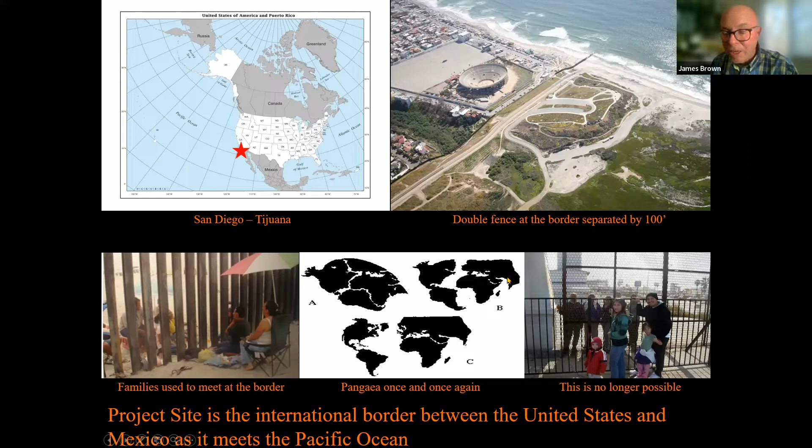Imagine, not that long ago, this is the way families used to meet close together. We're talking 10 years ago, this was the primary fence. You could meet, you could see each other back then. You can no longer do that. Year by year, the kind of communion we used to have has been taken away, one small Border Patrol order after another.

Here's the site, an aerial view. Again, the 30-foot tall fence build stopped here in the nick of time when Biden was elected, and now they're about to build it all the way to the sand right there. Here's Friendship Park, the center of Friendship Park, and the monument is right at this location.

It's worth remembering that only in 1971, when a Republican First Lady named this park, designating it International Friendship Park, she actually had her Secret Service agents cut the strands of barbed wire, and she walked into Mexico shaking hands and hoping for cooperation and solidarity in the future.

We have a treaty with Mexico. It was signed in 1848. And in the treaty, part of it says: upon a solid basis, relations of peace and friendship, which shall confer reciprocal benefits upon the citizens of both, and assure the concord, harmony, and mutual confidence wherein the two peoples should live as good neighbors. We're not fulfilling that treaty.

Especially in these times, do we need a place along the border that reminds us that the ordinary citizens of Mexico and the US are indeed friends. And we believe the best security we can have with our closest ally to the south is cooperation and trust.

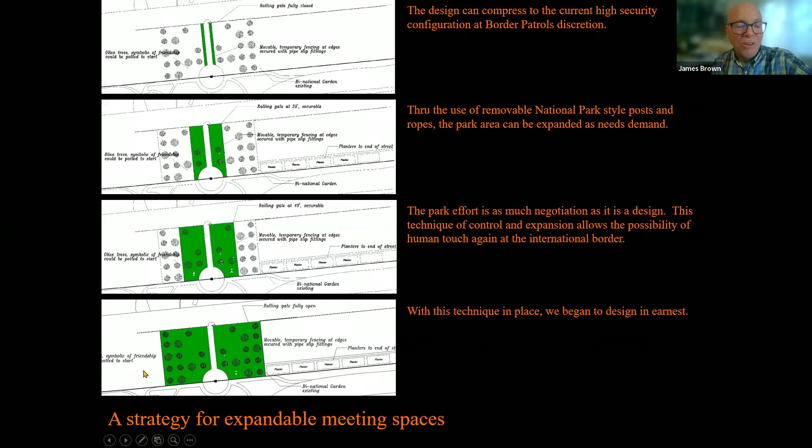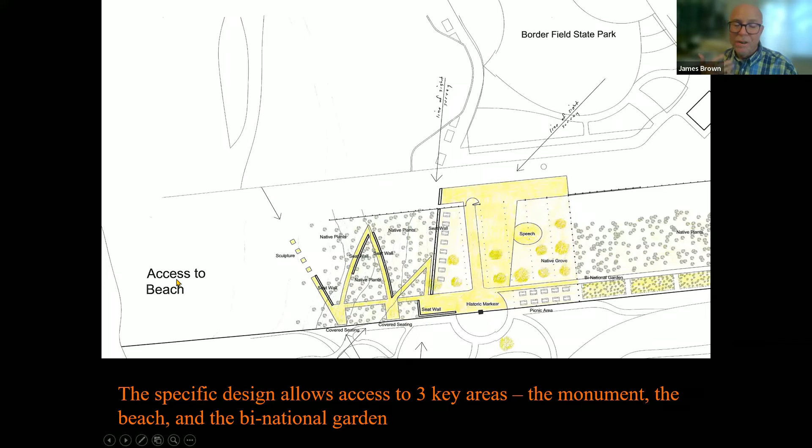It stayed that way for many years until slowly Border Patrol started taking away old promises. Shortly before they started going backwards in their negotiations with Friendship Park, we have long wanted connectivity - not just the historic marker at the center of Friendship Park, but the Binational Garden to the east and access to the beach to the west. These are three really important accesses we have been negotiating with Border Patrol for many years.

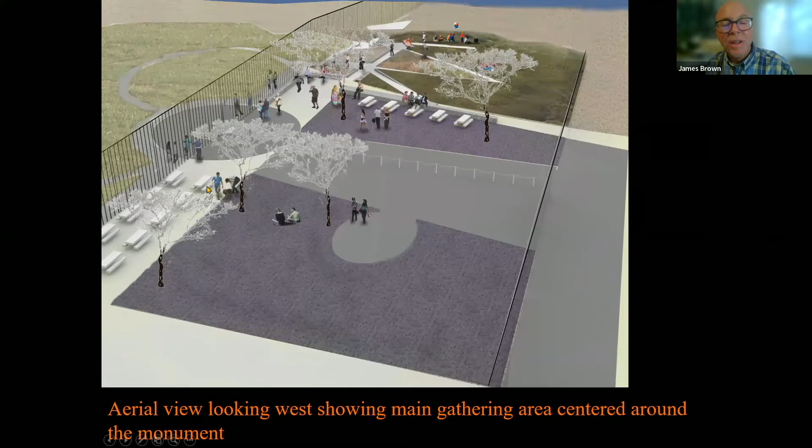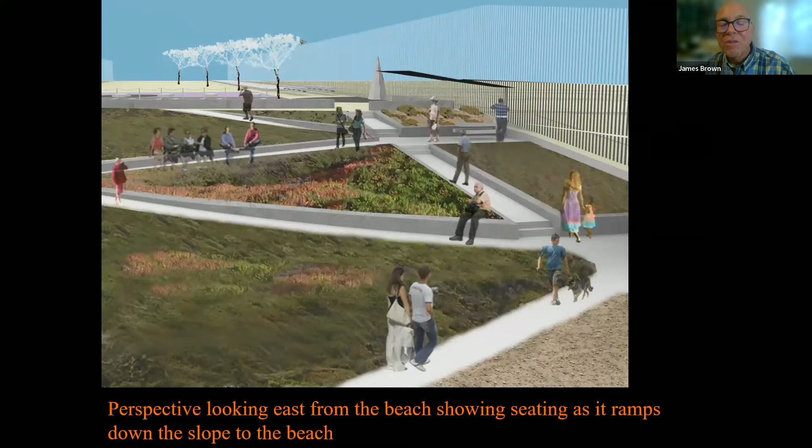We had done several diagrams, discussing what kind of furniture could we have that they would approve of. We were getting pretty far for a long time. We had some imagery of discrete meeting places where you wouldn't have to stand right next to another 35 people, so then you could whisper to your friends and loved ones across the fence.

If you're seeing your grandchild maybe for the first time, you would travel, wouldn't you? You would travel 1,000 miles or more to do that, and Zoom would not be good enough. If you were seeing your parents, maybe thinking it might be the last time, you would travel again. And people used to do this commonly, because there's no substitution for people being able to look in each other's eyes, talk quietly, touch each other.

We were talking about increasing the hours at Friendship Park where we would be able to use it. And well, that was from 2010. Things were a lot different then. But I feel like we can return to that kind of communication. We have a chance anyway. We're going to sure try. We're going to give it a fair shake.

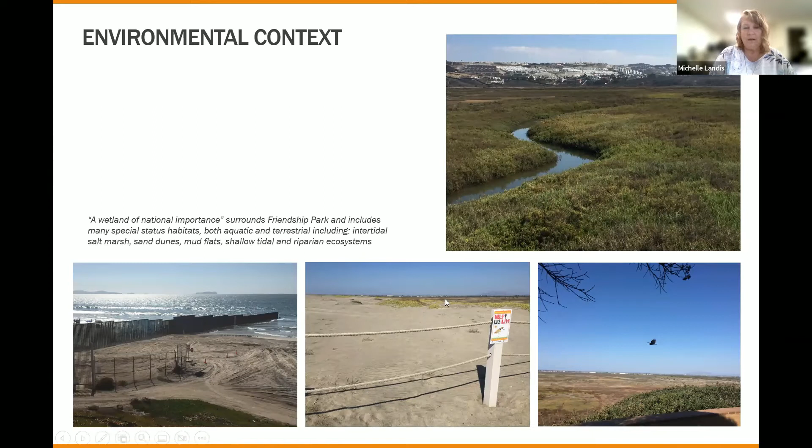This is sitting in wetlands of national importance. A lot of different special status habitats occur here, and a lot of research happens here. You've got sand dunes, salt marshes, tidal systems—very productive and important habitat areas surround Friendship Park.

In addition to that, there's a lot of cultural and historic context to this park. There are Native American use areas that fall all around the park and in the general area. We also have a lot of interesting World War II activity, training facilities, and coastal defense bunkers within Border Field State Park, and a lot of artifacts still in existence.

One thing I find very interesting is the Portola expedition came right through just east of Friendship Park, which is of course the journey of Father Serra moving up to start the Presidio and the first mission in San Diego. There was a campsite in Goat Canyon, just east of the park, so a lot of people haven't connected that.

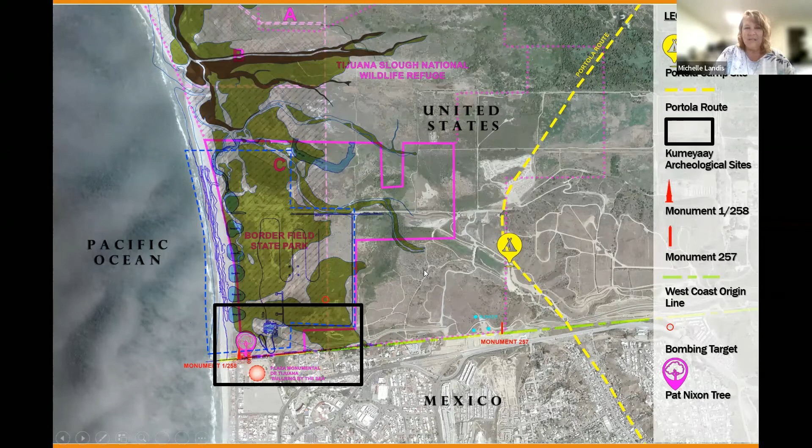So there's all these interesting things happening in Border Field and in the environments. And then, of course, the center, the heart of our park is our historic monument.

As Jim talked about, the Treaty of Guadalupe Hidalgo ceded Alta California to the United States. And a binational survey team came together and set the point of origin for the country, which is the location of our historic monument.

The original monument, Monument 1, was installed in 1851, and it was uniquely different from the other six monuments installed across the border, and it became very quickly a tourist destination in the Victorian era.

In that era, one of the things people would do was chip a little piece of the marble off and take it home for a souvenir. So in 1894, the marble of the obelisk was refinished, and it was renumbered as Monument 258.

And there was fencing put around it to protect it from souvenir hunters. So that monument that's kind of on the south side of the wall is the original monument installed in 1851.

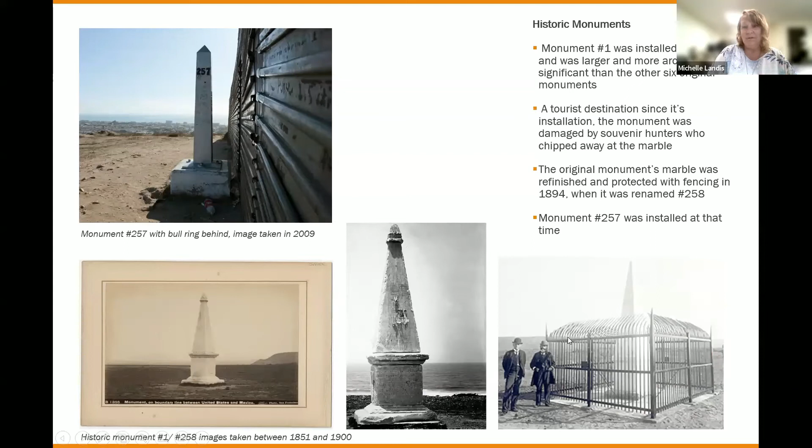So we kind of move into the postmodern era, recent past, jumping forward quite a few years. You've had a military past use, and now the land has become returned to surplus.

So part of Border Field State Park land is purchased by the people from California, and part of it is donated as part of this land grant from the Nixon administration's Legacy of Parks.

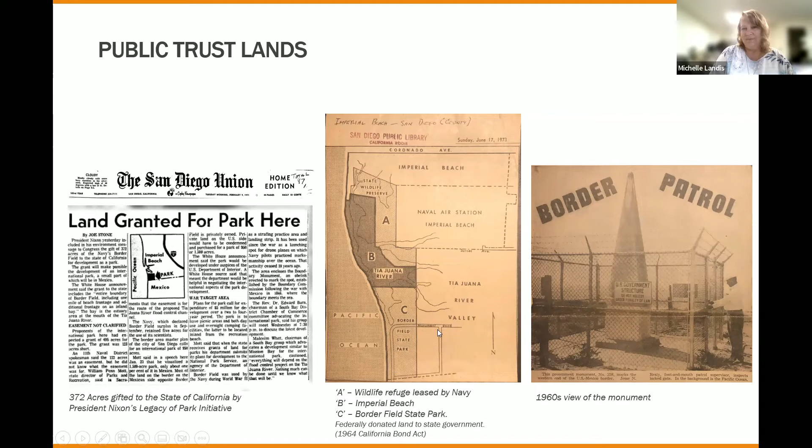August 18th, 1971, Pat Nixon comes out and does an inaugural ribbon cutting to this park. It is declared the first phase of International Friendship Park.

As Jim mentioned, she planted this historic tree. It's kind of back and forth whether that's the original tree or not. We know it is the correct species. Whether it was replaced at some point or not, we're not sure.

But she does have the Secret Service cut the barbed wire and walks in to greet adoring fans in Mexico. That's a fun little side foray that probably made the Secret Service very anxious that day, I would imagine. In 1974, the monument was placed on the National Register of Historic Places.

And there's a park design that really celebrates this moment in time. You can see each country has put their national flag, and there are small granite markers and plaques that commemorate this event. The flagpole and the plaque and the granite base still exist on the Mexico side.

I'm not sure when the flagpole disappeared on the US side. We know that the marker and plaque disappeared around 2012 with some of the renovations, when it was already in the secured area. So here's a view of the park in 1986.

Although this area is fenced, you still have some visual permeability and the ability to kind of connect with your loved ones. Also, the bull ring is a significant piece of architecture from this era.

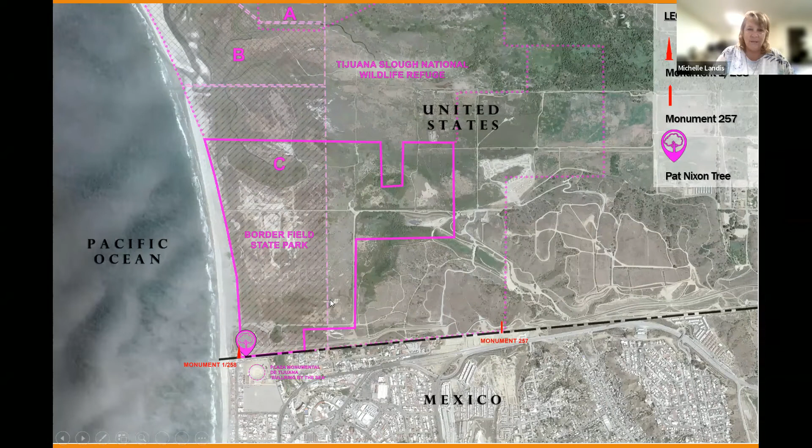And then moving into the present era. Really starting in the 1990s is when you see the real fortification of the border occur. This is a response to the debt crisis in Mexico and the war on drugs. And so military surplus runway panels are used, mounted vertically, to create this wall to control access across the border.

Prior to that time, a lot of times families could just ride horses, kind of go under the barbed wire or around it and meet with their family on the other side. And I certainly have people in my circle who talk about doing that in the 80s.

In the 1990s, you can get a closer view of what that fencing condition was through Friendship Park, but there's still the opportunity to engage with your loved ones and meet with them quietly and be able to connect.

Of course, we have the tragic terrorist events on September 11th, 2001. This really sets a series of things in place to secure our borders even further. You have lots of money available for border construction projects in 2006 and 2008. That's the point where the statutory waiver, or statutory exemption, of all environmental, historic, and cultural protections for border projects are put in place. So some of you may know that nothing is protected from these border projects, which has been a problem throughout the Southwest and something we're certainly concerned about here.

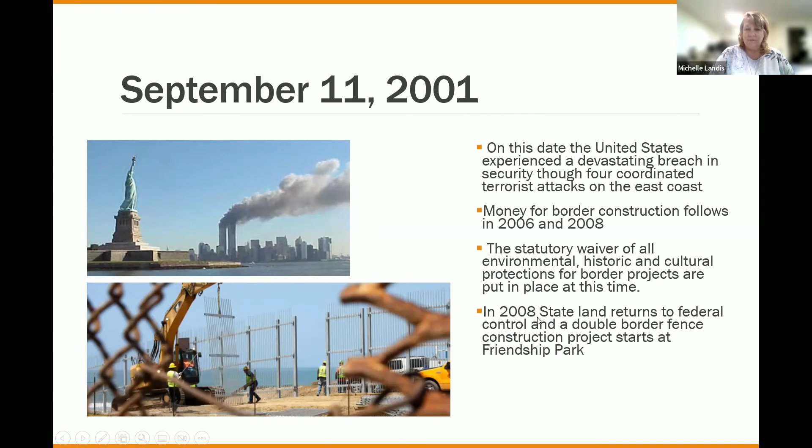In 2008, the state land returns to federal control, and the double fence construction commences. So you can see the condition in 2008. Moving into 2012, again the wall is pulled back away from the monument, probably having to do with the footing of that wall not being allowed to cross into Mexico's territory.

And then present day, you can't even approach the secondary fence. This is the line of no trespassing mounted currently. So you definitely can't see the monument or visitors on the Mexico side. In the 2012 construction, you can kind of see the progress of abandoning the monument on the south side.

Friends of Friendship Park was very proactive in trying to get the park reopened, and the caveat was the 1/4-inch mesh. So we're very fortunate to have Maria Teresa, who documented a lot of this construction so beautifully over the years, but you can kind of see what that looks like in person.

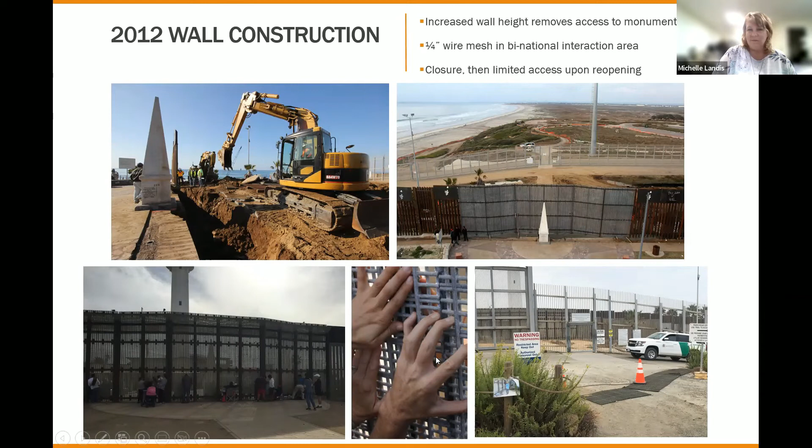I visited the park on a weekend, maybe this was 2018 or so, and this was a pretty typical Saturday, no events happening, but you can see the number of families who are using this park to meet with their loved ones at that time.

2012 had damaged the binational garden, so I know Jim was involved in the design efforts to recreate that. From about 2012 to early 2020, it was a pretty robust native plant garden, with a lot of concepts around the fauna being able to cross and the pollinators to cross one another, and to be a human gathering place with the plants around.

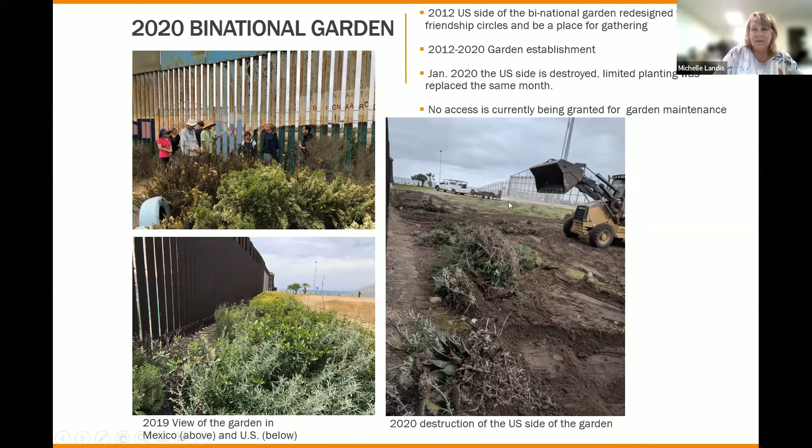But in January 2020, the US side is destroyed. There's a lot of reasons about why that happened, a lot of changing stories. There was limited planting, a much smaller scale garden planting allowed to be restored, but then access to maintain that garden has been cut off. So currently there's no access being granted to maintain that garden.

So we touched a little bit on this waiver process. Many of you may be familiar with the typical NEPA or CEQA process, where for a major project you go through an environmental impact report or environmental impact statement, which is an extensive document for something this size—probably a 1,500-page document. It explores different alternatives and discloses what cultural, historic, or environmental things may be lost in the construction of the project. All of that is waived. So these border projects do not have to follow that process.

There is an environmental stewardship plan in place. I actually placed a link to that in the chat for any of you who might want to read what criteria is protected. I would say this is not nearly the robust document that we typically expect to see in our normal legal NEPA or CEQA process.

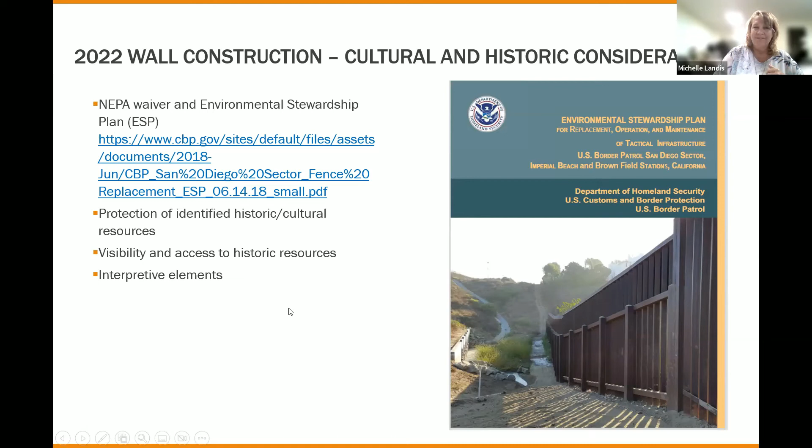So it calls out things like identifying historic or cultural resources. It should be calling out how those should be accessed, maybe interpretive elements being added to the project because of so much extensive history in this area. Those would be nice adds to have, but some considerations on that cultural and historic front.

From a governmental consideration, things about access to the park, both vehicular and pedestrian—there's been some talk of reworking the roads to make them less seasonally impacted by rains. We think that's a great effort to get more people to the park more reliably. Other considerations are the staffing and training of the people actually in the park when it's opened to the public. Should that be Customs and Border Protection officers, or is there a possibility of other, more park-like staff—more like ranger staff—that could instead be the interface with the public?

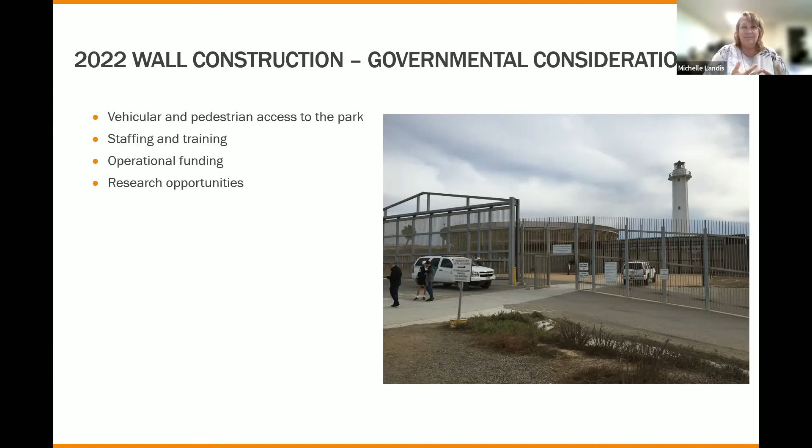And I think there's a lot of great research opportunities. That certainly happens in the estuary, but there's also research opportunities with the historic and cultural context, and the kind of cross-personal connection context of this site.

Environmental considerations, again, I'll point you back to this environmental stewardship plan, which is going to detail the way that some of these considerations are handled, or may be absent from this plan.

We believe the binational native plant garden is a native habitat, so we will be asking for repairs and maintenance considerations for that. Sediment into aquatic systems has been a big factor throughout the Southwest in these border wall projects. There haven't been the BMP processes in place, so if that's a concern to you, that might be a good comment point. Water quality is already an issue at the border, but adding the sediment problem creates a much more complex issue.

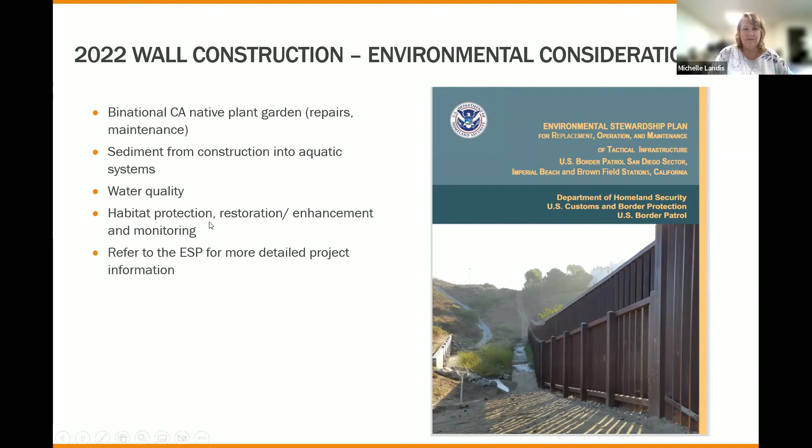Habitat protection: noise from construction can impact some of the special status species that are out there, and how the restoration and enhancement of vegetation establishes after construction, and how they monitor that to make sure it continues to establish. Again, this ESP is going to give you a lot more detailed information in that regard.

And then humanitarian considerations. Jim talked a lot about the height of the wall. We all know Customs and Border Protection has been very clear that they want the 30-foot high wall. We're hoping we can justify why this area is so special, that it should be treated differently and not like someplace out in the middle of the desert.

And then users of the park. In the past, there was daily, weekly, quarterly, annual events that happened at this park. I think we would love to see those types of events return, and consider how many people are allowed inside the park. When I visited in 2018, there were 25 people per time allowed, but it wasn't always enforced.

If there were a few families, they might go over that limit. I would say right before the park closed, about late 2019 as I recall, they had ramped it down to 10 people strictly enforced, which meant people were lined up and would sit out there for hours and not get a chance to see their loved ones after venturing hundreds of miles away.

Again, park staffing and enforcement becomes part of this humanitarian consideration, of who's the interface person with the users of this park.

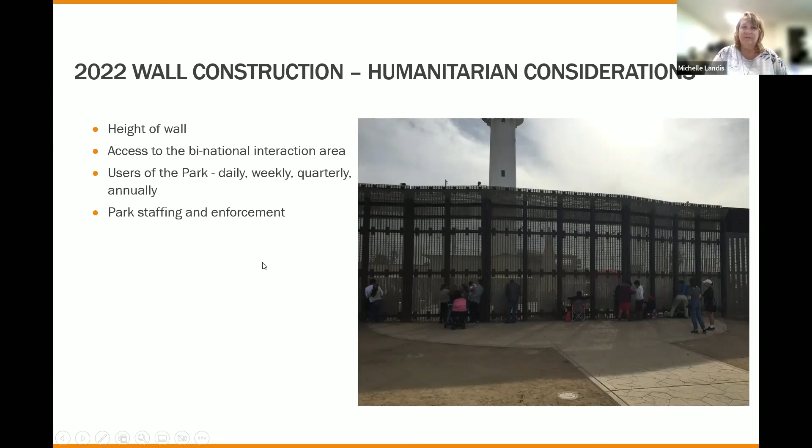And then security considerations, Jim talked about this too. We have worked really hard to engage Customs and Border Protection because we know their enforcement is a key driving factor of what happens in this enforcement zone. If we can understand the criteria they need to perform their activities, then us as designers can be creative in the solutions of how we accomplish what needs to happen, both from a human perspective and a park user perspective, but also from a security perspective.

I do a lot of work with military projects locally, so it's not reinventing the wheel. A lot of these issues are already addressed on our military bases, how historical and cultural areas are protected and how they engage with the public, clear lines of sight, furniture that isn't a concealment problem. So we know how to do this. There are codes in place that drive all of this.

But things we need to consider as designers are things like, where are the agents going to park their cars? Right now they drive through the whole park, and that's not helpful for creating a park-like area. There probably needs to be a more dedicated vehicular movement pattern. Where are the camera nest locations located?

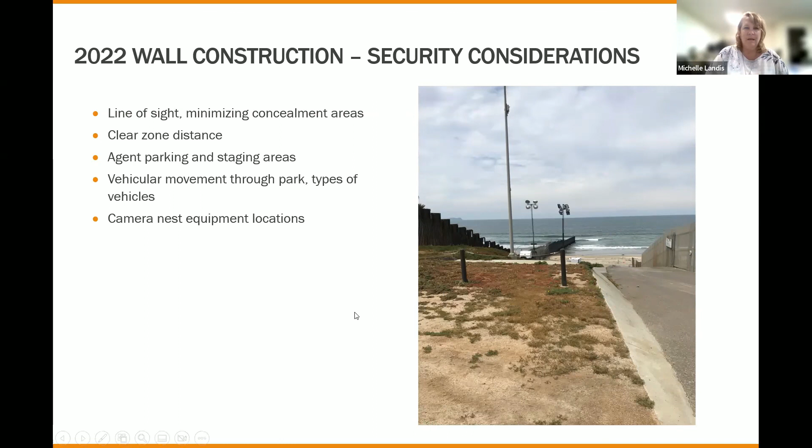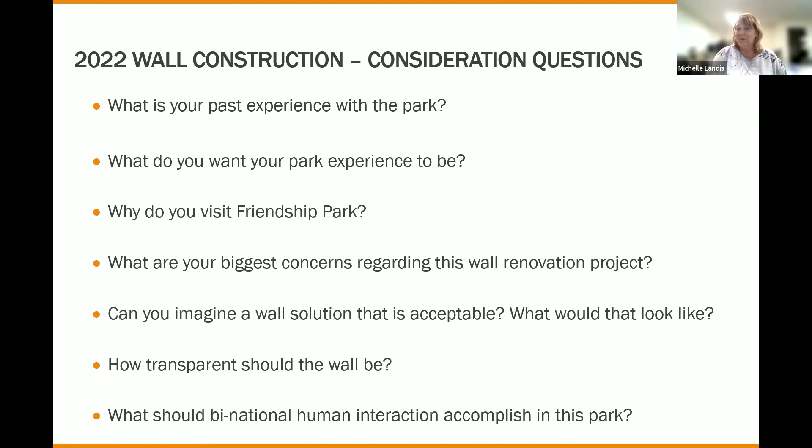So considerations for you as you're hopefully thinking about responding to our quick written survey: what is your past experience with the park, and what do you want your park experience to be? Why do you visit Friendship Park, and what are your biggest concerns regarding this wall renovation project, now that you hopefully understand a bit more what is proposed? Can you imagine a wall solution that is acceptable? What would that look like? How transparent should the wall be? And what binational human interaction should be accomplished within this park?